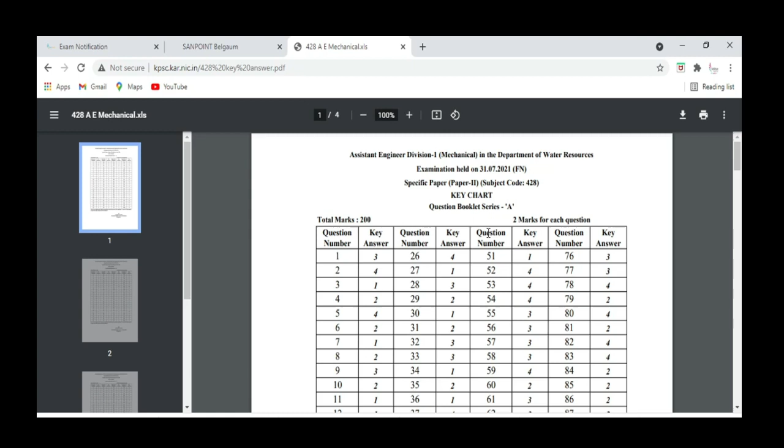Now if you click hours, I think it is 428. So 428 is our AE paper. Now whichever booklet number series you are having, ABCD, you can see and then you will get to know the key answers.

It is clearly mentioned that for every wrong question, the candidate will lose 1/4 of the marks. That means the questions are 2 marks, so you will be losing 0.5 marks per question. So these are the key answers which they have released.

But when we went through the key answers, we found some discrepancies. Let's see which are they actually.

Now if you see here, these are the key answers which the KPSC have released. So previously in the document. For example, if the first question is wrong, you should write here as question number 1. If the other option is correct, say option 2, you should write here as 2. And now you should write your answer, for example if it is 3, then you write here as 3, and write the justification of that, not more than 100 words.

Now let's see the questions which you can challenge. The very first question, that is question three, is about working out exact quantities of the various items of the work. There is a little bit of grammatical ambiguity in this particular question. As per us, it should be estimation, but KPSC is saying that option 1 is correct. So you can challenge this.

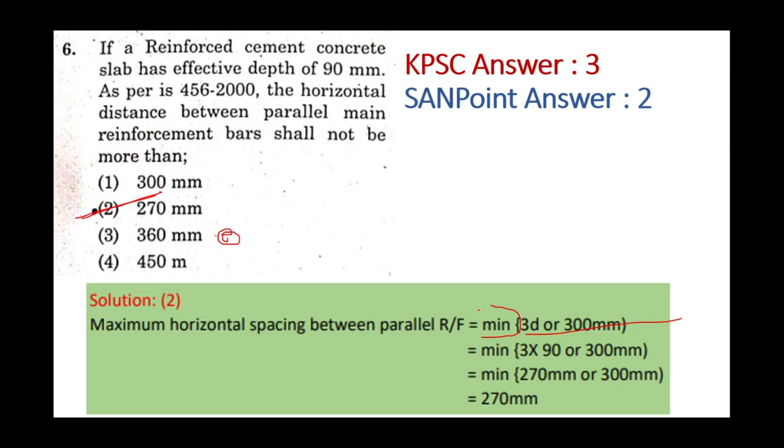Now the KPSC is giving this as the correct answer, but as per us, the correct answer should be 270 mm. You can see the reason for that, because it should be whichever is minimum. So the minimum will be 270.

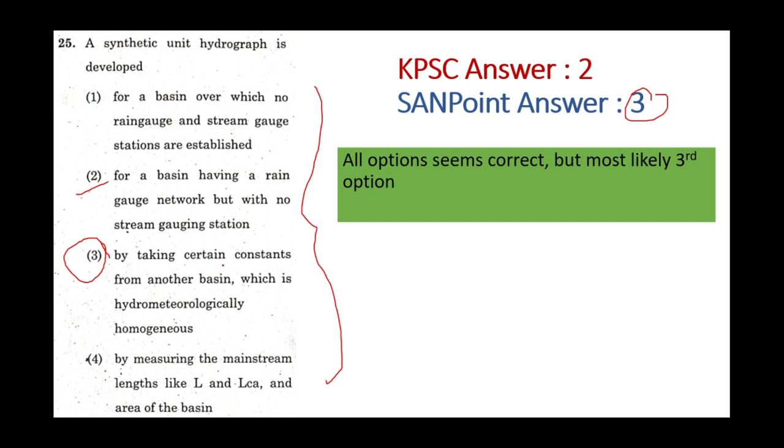Hence the correct answer is option 2. Now for this, there is a lot of ambiguity with respect to this particular question. When you read all the options, you feel like all the options are right. But KPSC is saying that option 2 is right. When you do a more accurate analysis, we feel that option 3 is right.

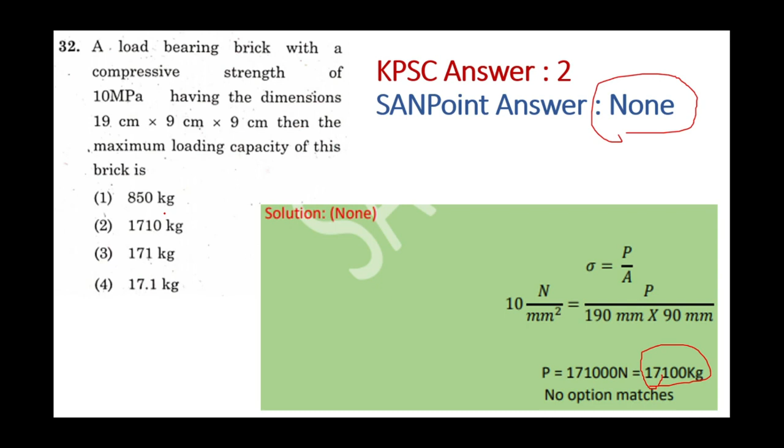Next, 32nd question. These questions are from series B, remember the order, they are from series B. Now when you see this particular question and try solving it, your answer should be 17,100 kg. But here none of the options match. So hence we cannot give the correct answer, or maybe there is some typing mistake. It should have had one more zero added in this particular option.

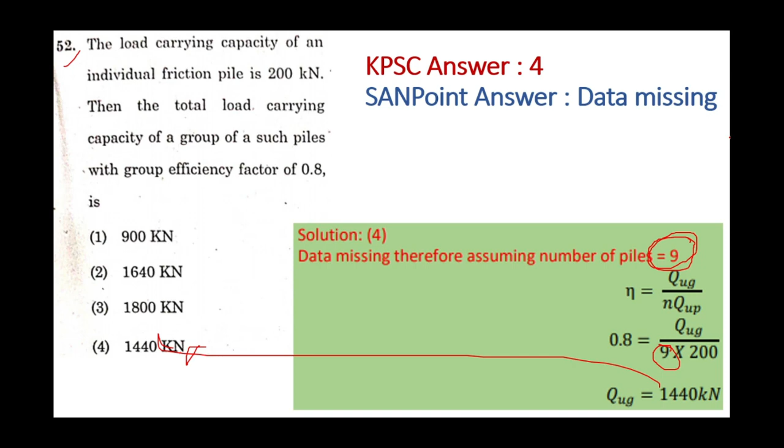Next, 52nd question. When you read this, here data is missing, that is the number of piles. It is missing. When you consider 9 as the number of piles, then only you will get the correct answer as option 4. If you don't consider it, then you will not reach this. So data is missing, okay?

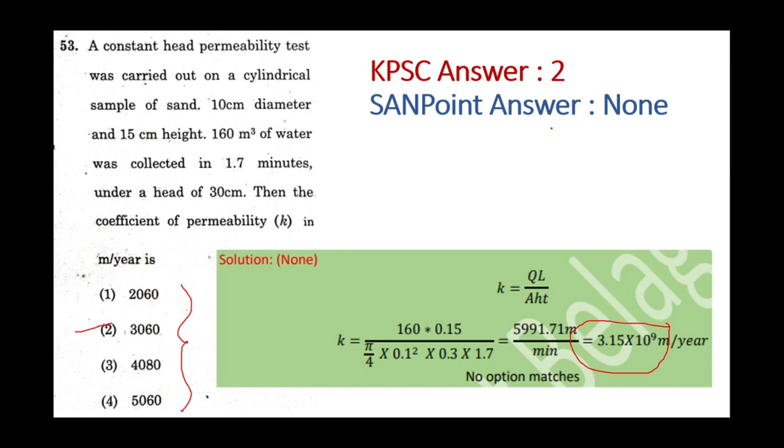Now when you read the next question, when we do the calculation, we are getting this as the correct answer, which is not there in any of the options. But KPSC is saying this as the right answer. So you can challenge this question as well.

And this question is very simple. As per them, this is the right answer, but the correct answer is 1.676 meters, which is a railway engineering question. Here you can see this is the justification, broad gauge 1676. There is one book for this. You can take the photo from that book and then submit it.

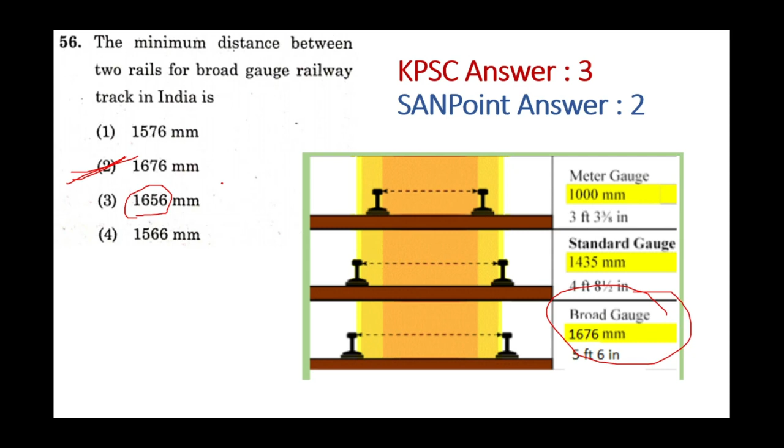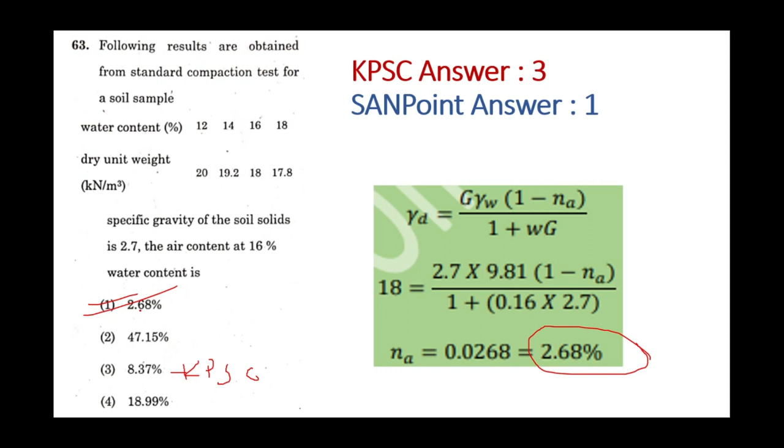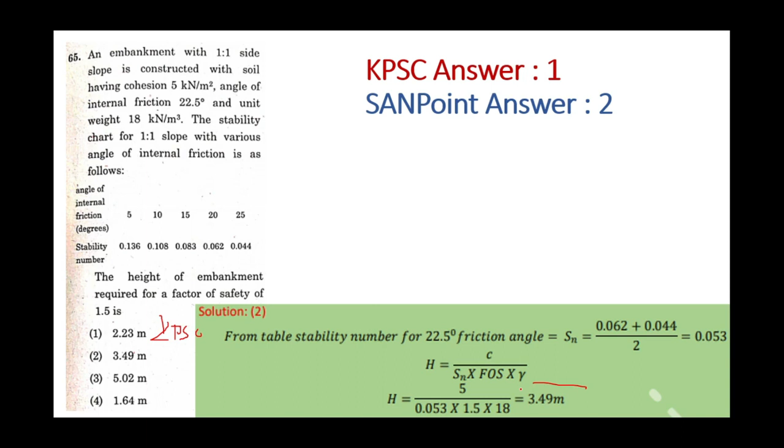Next, 65th question. KPSC is giving the first as the right answer. But when we do the calculation, we are getting the second option as the correct answer. Now this particular question has a lot of ambiguity.

We are not able to get the right answer, but KPSC is saying that option 1 is the right answer. So if you have any justification for this, you can challenge.

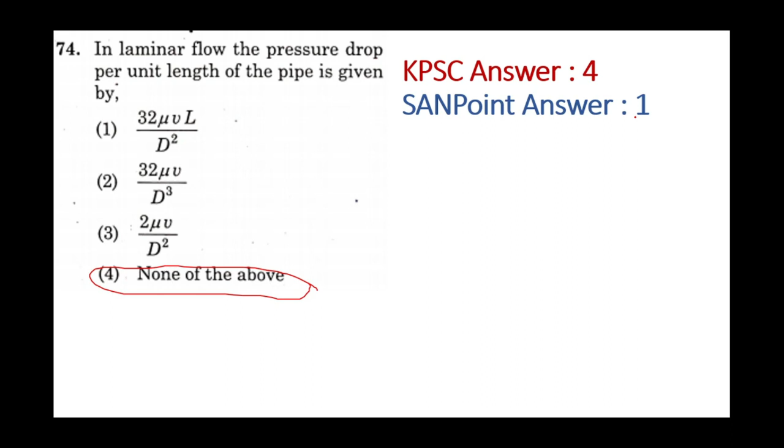Next question, again very easy question. They are saying it as none of the above, but as per us, option 1 should be correct.

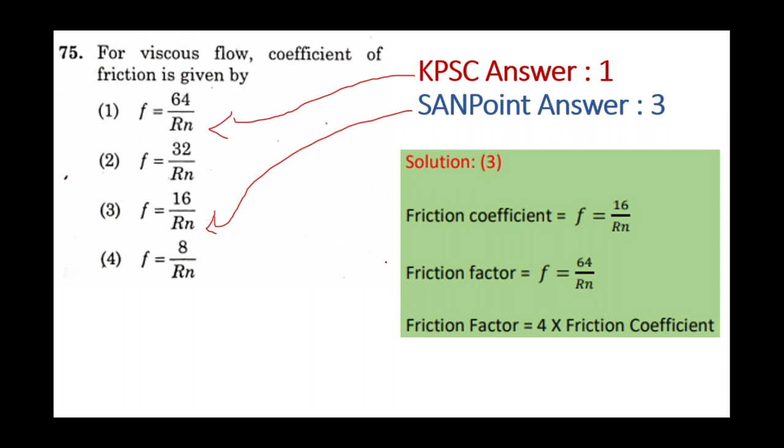And again in the next question, KPSC is saying option 1 is right, but as per us, as well as per the data we have, option 3 should be the right answer, where the justification is given here.

Now in the next question, KPSC is saying option 3 as the right answer, but actually option 1 is the correct answer, that is 2.

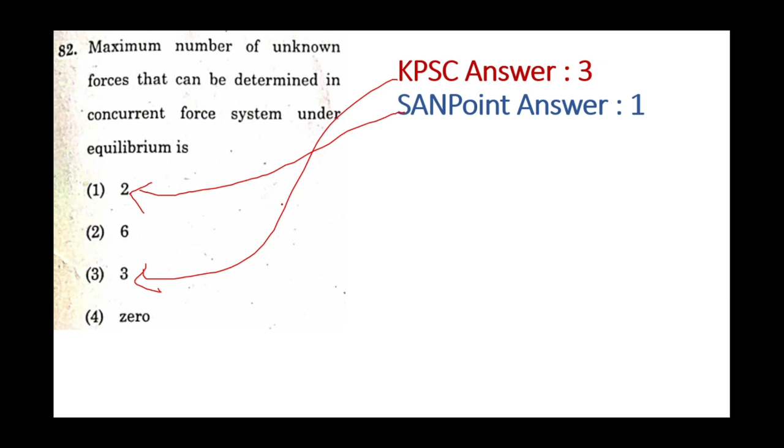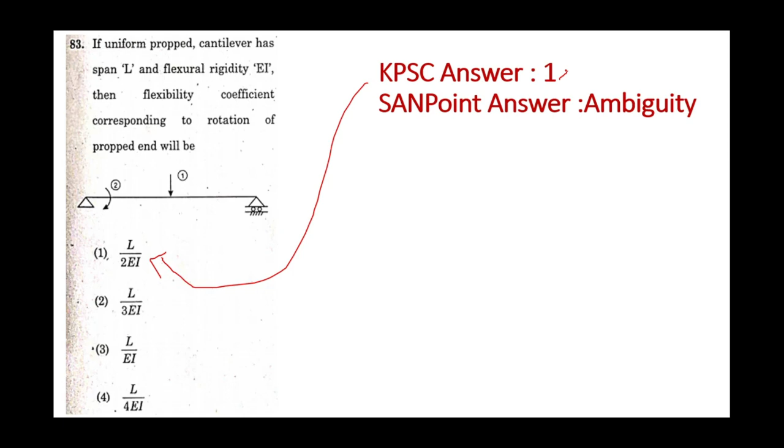Next question, again there is ambiguity in this, but KPSC is saying that option 1 is right. So if you have any correct calculation for this, and if you get option 1 as the correct answer, then you can leave it, no need to challenge.

And now this is very, very important. Data is missing, that is 135 kilonewton. When you read the question, nowhere have they used the word 135 kilonewton, and they haven't mentioned anything about this in the figure either. But when you take 135 kilonewton horizontal force at Q and calculate, then you get the answer as 15.69 mm. That's when you get it.

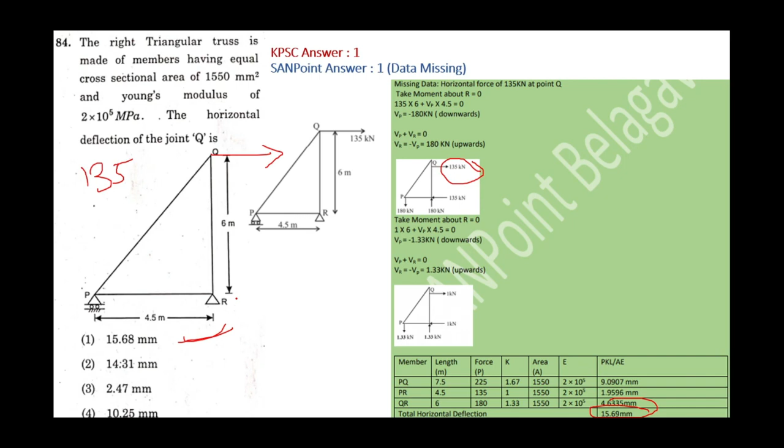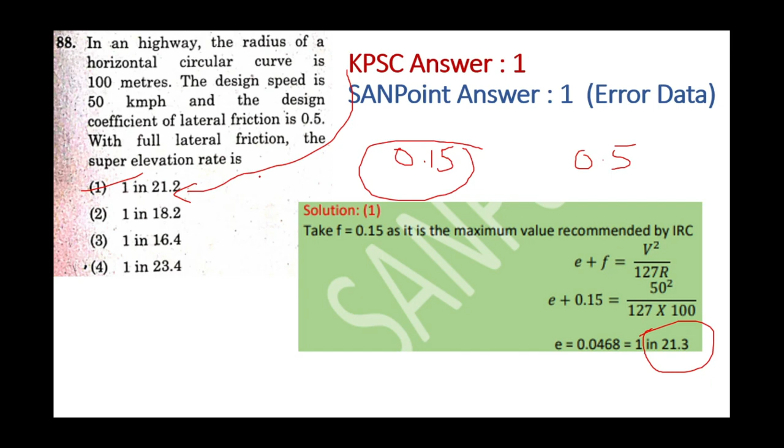But some students, if you considered 0.5 and calculated, that time you will get it as a negative answer. So such students, you can challenge it. Hope you are getting me right. So for the error in the data, you can object to it.

So next question, very very simple survey question. KPSC is saying option 4 is right, but everyone knows option 1 is right - W square L by 24 P square, which I have answered or taught in our video lectures in surveying. So very simple question.

So these are all the questions which you can challenge. If any of your juniors are in final year, ask them to go to college library, get the books, do something. There are 19 questions.

If each of you just sends me proof for 2-3 questions, within 2-3 hours we can get the official answers or the proof answers for all the questions. Then you can challenge it. Everyone's work will be made much easier by doing this.

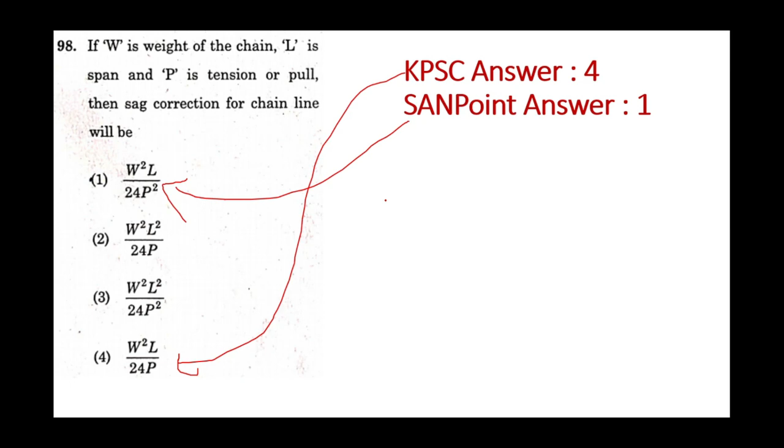And along with this, some students are talking about 2 more questions, one on surveying included angle, and another from environmental engineering, the distance of the manhole. Because in manhole, the distance obviously depends on the diameter. So if you guys want to challenge these 2 more questions also, you can challenge, just send me the proof. Daily I am getting 20 to 30 calls with respect to this.

For general merit women category, 180 to 190. General merit rural, 180 to 190. And if you have Kannada medium, for example general merit rural Kannada medium, you can expect 10 marks less than this. OBC 180 to 190, OBC women 170 to 180.

And if you have categories like 1A, 1B, 2A, 2B, 3A, 3B type categories, you can expect 160 and above. SC category 170 to 180, ST 160 to 170, SC women 130 to 140.

Again if yours is SC women or rural Kannada medium, you can reduce 10 marks and calculate accordingly. Okay students, so this is what I wanted to discuss in this particular video.

So now let's start working to get the correct answers for all the questions which you are going to challenge. And again in the evening I will be making one more video once I get all the proofs for all the questions. So this is what I wanted to share.